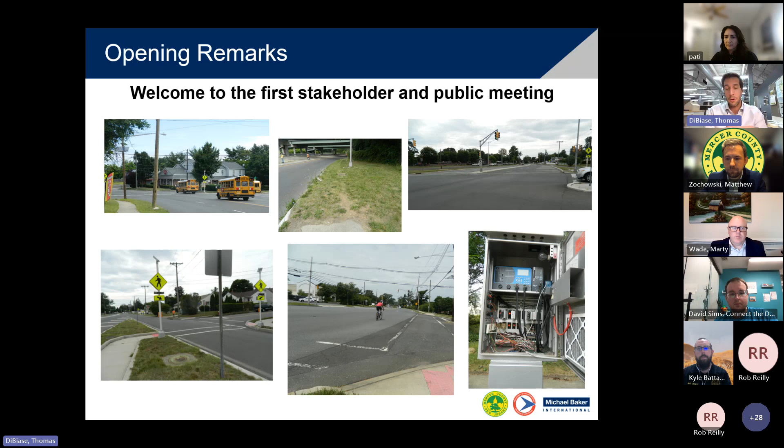We've had our opening remarks and covered our meeting guidelines. We're going to briefly start with a fun activity and review our public feedback process, then get into our project overview, where we'll discuss the project goals, the location, and some of the study materials we've collected thus far.

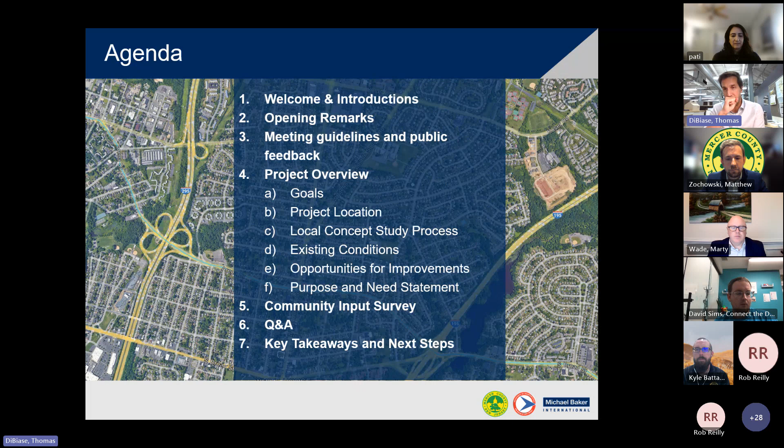Most importantly this evening, we want to review the purpose and need statement for the project, our goals and objectives, and hear your input on that document. We want to make sure we're framing this project appropriately and that the public has input. We'll also introduce our community input survey on our website, encourage you to visit it and fill it out as a great way to get involved, then open it up for Q&A and conclude with key takeaways and next steps.

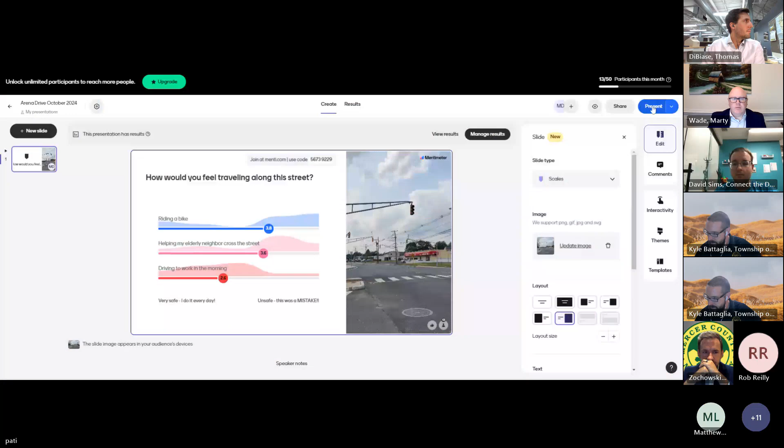All right, this was just a very brief activity to get you all in the mindset of why it is that we're all here, why this is an important activity. So it sounds like riding a bike feels like a pretty unsafe activity on this particular intersection. There are no bike lanes, it's very wide. It also feels like next on the list is crossing the street with an elderly person, not super safe either. And then driving to work feels like the safest activity. Thank you all for participating.

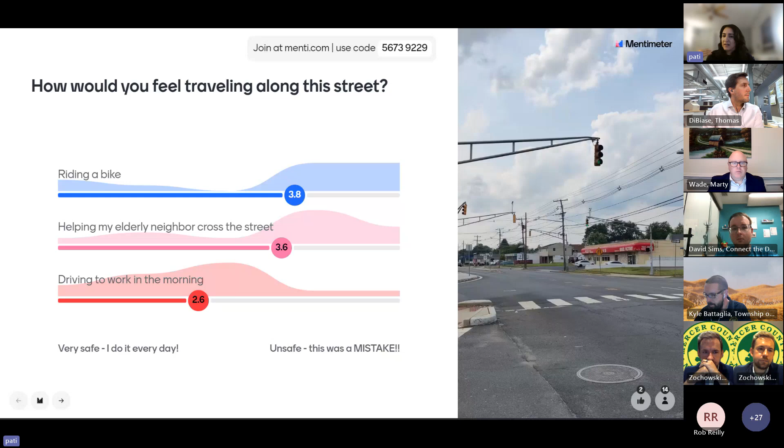It was just to give us a sense, as Tom is walking us through the presentation, think about what your experience is on Arena Drive. If there are any intersections we missed, please put any input in the Q&A, and we are recording all of that to share with the design team. Thank you so much.

So I'll take us through our meeting goals here. Of course, we're here to introduce the project to the stakeholders and to the public. Our mission is to review our existing conditions that we've collected for the corridor, and also to review our opportunities for improvements and to gather feedback from our stakeholders and the public on these key issues. So those are our meeting goals in summary.

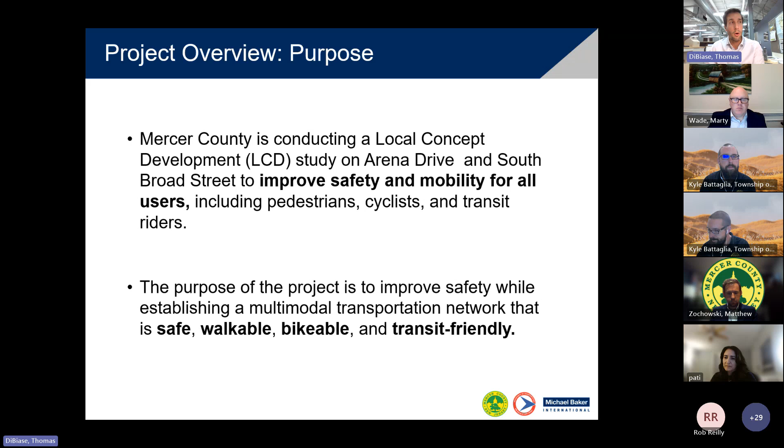So this is a project overview. The purpose of the project: Mercer County is conducting this local concept development study to improve safety and mobility for all users, including pedestrians, bicyclists, and transit riders. The purpose is to improve safety while establishing a multimodal transportation network that's safe, walkable, bikeable, and transit friendly.

Now, we have spent a little bit of time on our study area map already. Important takeaways here is that it's a community roadway, and Mr. Zochowski laid this out quite nicely in his opening remarks. It serves as a regional connector, but this is a community roadway first, and the proximity to McGalliard Elementary School and Yardville Heights Elementary School really sends home that message to us as the project team that we need to find opportunities to make crossing this roadway as a pedestrian, bicyclist, transit user, or even as a motorist, more safe in the future.

After that is concluded, we convene to develop alternatives. So the project team develops alternatives to address our purpose and need and goals and objectives, and the feedback that we've received from the public and our stakeholders.

And we develop alternatives, and we have another touch base where we come back and meet with stakeholders to discuss those developed alternatives. Then we select a recommended preliminary preferred alternative, and we meet one last time with the public in the spring to present that preliminary preferred alternative before completing our project through some reporting.

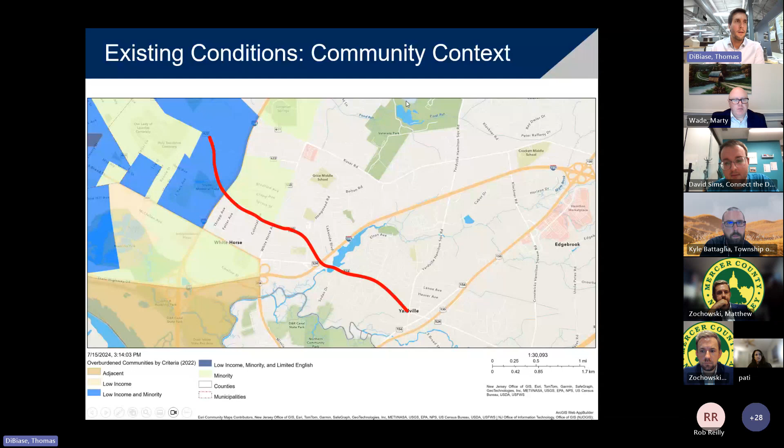Okay, I'll move on to our key issues. So essentially, our roadway design enables speeding. Because we have highway interchange ramps that come directly and meet Arena Drive and South Broad Street, these interchange ramps enable speeding. And wide cross sections at our intersections also reinforce this behavior. Below I-95, with very wide lanes, it reinforces this opportunity to speed.

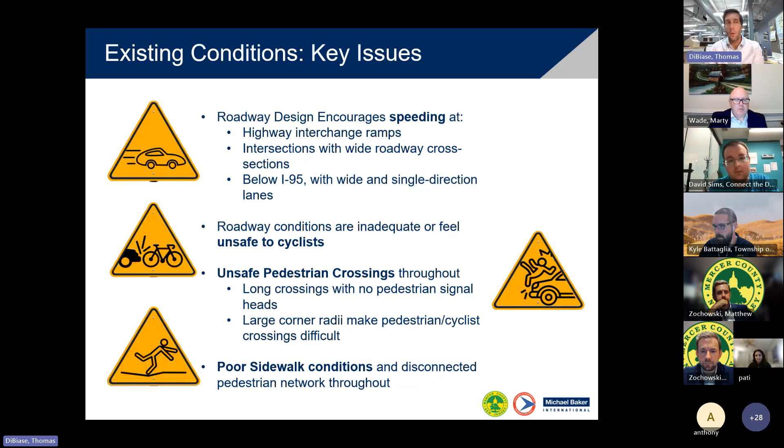Roadway conditions are inadequate or feel unsafe to bicyclists. And there are unsafe pedestrian crossings throughout the corridors, with long pedestrian crossings with some deficient crossing equipment like pedestrian signal heads and faded crosswalk striping. We also have large corner radii that make pedestrian and bicyclist crossings difficult. And in some areas we have poor or deteriorated sidewalk conditions, or disconnected pedestrian networks throughout the project. So we'll move on here.

So this is essentially a look at how roadway design enables speeding. Here's our highway interchange ramps. This cross section, and the favorable geometry for turning as you're coming off the interstate, suggests to motorists that they're able to travel at high speeds. Secondly, we move to our intersections with wide cross sections, so it's a long pedestrian crossing from one side to the other on many portions of this roadway. And here we have our section below I-95, where we have a single direction roadway that's awfully wide, which again encourages and enables speeding to take place.

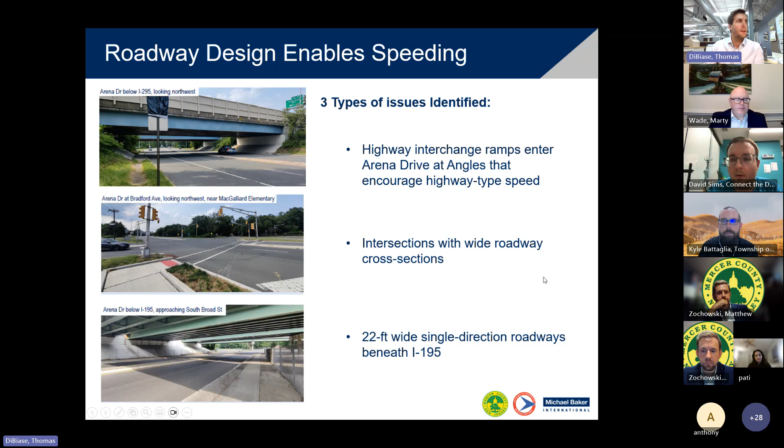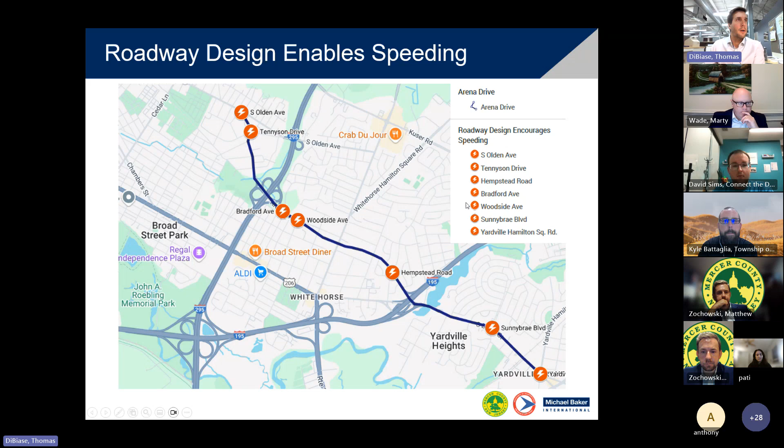So we have a number of intersections noted here, and the purpose of the slide is to communicate that there's opportunity, especially at these particular intersections which are awfully wide, for us to slow the speed of through traffic and turning vehicles. We have wide radiuses on many of these turns that allow for favorable turn geometries, and they decrease the opportunity for motorists to yield to pedestrians, bicyclists, and transit users, or to perform their maneuver safely. So I'll move on.

So I'll move on here.

At Yardville Hamilton Square Road, we have another section with rather large corner radii that make pedestrian and bicyclist crossings more difficult. We identified a handful of intersections, including Tennyson, Bradford, Hempstead, Sunnybrae, and Yardville Hamilton Square, where we have favorable geometry for turning maneuvers, which is unfavorable to safer driving conditions and effective, easier crossing for road users.

Here's an example of some of the poor sidewalk conditions we see on the corridor. We have a disconnected pedestrian network throughout the corridor. Here's an example near Central Avenue. We see that repeated not only at Central, but between Central and Reeves, near Colonial Avenue, and there's an unfavorable pedestrian situation under the I-195 interchange as well.

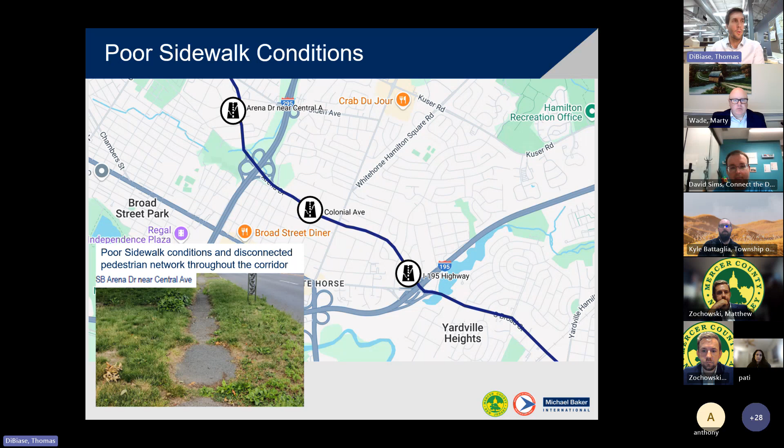All right, I'll move right along. This is a great look at our crash hotspots on a heat map. Basically, the deeper the red color, the higher the crash density along the corridor. This data is from 2017 to 2021, a 5-year period. What you see below is a little difficult, but I can walk us through a few of these intersections.

This graphic shows the number of crashes on the y-axis, and on the x-axis it shows the corridor. Here's Arena Drive, and this corresponds to the crash hotspots you see above: South Olden Avenue, Tennyson, Reeves, Bradford, Whitehorse Avenue, Gropp, and Hempstead. So a good number of our signalized and unsignalized intersections along that stretch.

For Broad Street, we have Highland Avenue and Coleridge, as well as Sunnybrae Boulevard and Yardville Hamilton Square Road. It's important for us to analyze crash data. We take a look at crash contributing factors, as well as crash type and other circumstances around all of our crashes, especially focusing on our fatal and severe injury crashes. We draw conclusions from those as we build alternatives for solutions for the corridor.

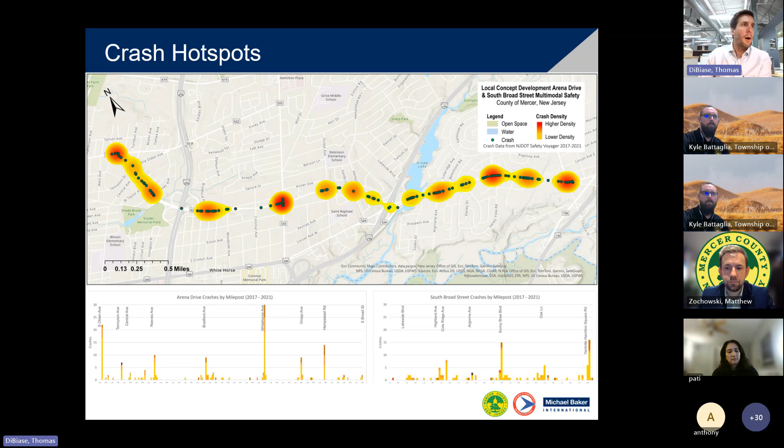An example of that appears here, showing how we use data to inform solutions. Here we have a look at fatal and serious injury crashes on the corridor. We can see that 2 of these crashes are pedestrian crashes, so 50%, and our lighting condition for 3 of our 4 crashes were in dark conditions.

So some examples we may draw from data like this would be that we have inadequate street lighting in certain locations associated with these crashes that would need to be addressed through the project, and that we have issues around pedestrian safety, where crossing countermeasures and improvements should be deployed at specific intersections to solve these issues. That gives you an example of how we approach the project and how we use data to inform our solutions.

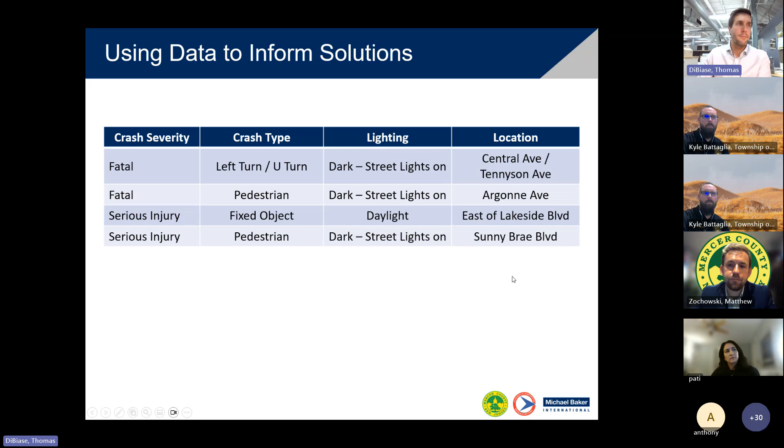Okay, I'll move on. So here's our opportunities. We have a number of traffic signals along the corridor, and plenty of opportunities at these locations to improve crossing conditions, to address our geometry on the roadway, and to improve conditions. I've basically covered this point already, so in the interest of time I'll move on. But this is an example of some of the signalized intersections, which are hotspots for crashes, and we expect to address these throughout the project.

Here's some opportunities for pedestrian and bicycle infrastructure. The map is showing a couple key areas where pedestrian and bicycle infrastructure is essentially not available for longitudinal travel along the roadway.

Underneath our underpasses at 295 and 195, conditions are unfavorable due to the wide cross section, or due to degradation in our sidewalk, or we have a path that's inadequate to fit both a pedestrian and a bicyclist at the same time.

We've also identified Gropp Lake, knowing that we have a fixed cross section across a bridge there, which is also a potential problem area. Our mission is to find better ways to build out pedestrian and bicycle network along Arena Drive and South Broad Street, addressing key points at these interchanges where crossings are unsafe, as well as Gropp Lake, where our cross section is constrained.

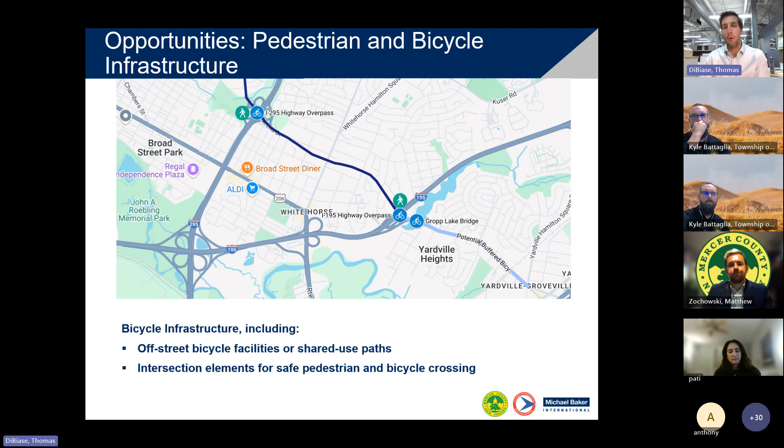I'll take us through our purpose and need statement. The local concept development phase involves drafting a well-defined purpose and need statement. That's our first mission, and the statement will be used to develop and evaluate potential alternatives. This is informed by community outreach, data collection, environmental resources, and socioeconomic conditions, which all come together to form our purpose and need statement. Eventually, our purpose and need statement defines our conceptual alternative selection.

Our purpose, and I'll repeat it again: the purpose of our study is to address safety deficiencies on Arena Drive and South Broad Street while establishing a multimodal transportation network that's safe, walkable, bikeable, and transit friendly.

On the next slide, I'll give an example. We can pause and review this later, but our mission is to visit the text in bold—these are our goals and objectives. So we're here to address our roadway deficiencies to improve multimodal safety. That's our first goal up top.

We do this by implementing FHWA—Federal Highway Administration—proven safety countermeasures. They have a suite of proven safety countermeasures available for us, and of course we have extras we're going to explore for the roadway in order to get proven, tried and true safety improvements.

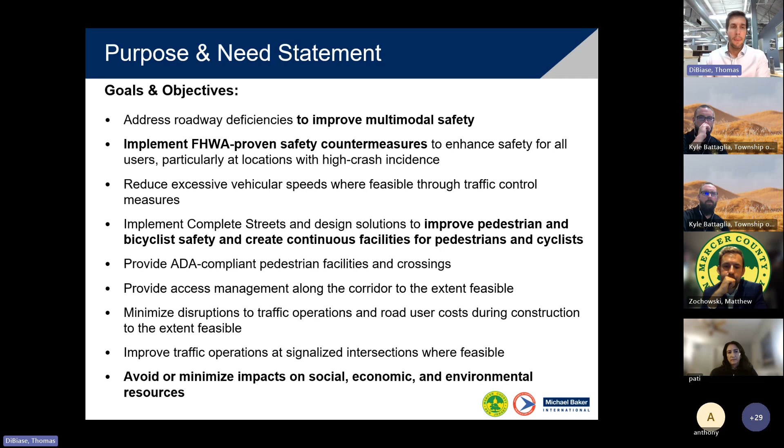I'll conclude with our last goal at the bottom of the page: to avoid or minimize impacts to social, economic, or environmental resources. Here, social economic refers to the neighborhood, our neighbors, our residents, our business owners, our community. Our mission is to minimize impacts while addressing our purpose and need, and the environment is included in that statement as well.

Our community input survey is one of the best ways to get involved with our project. Completing our survey is a tremendous way to focus our efforts and to hear your feedback. It's published today to the website, available at mercercounty.org/Arena Broad Safety. You navigate to that site, scroll to the bottom—I'll take us to that page in just a moment—and you'll see a link to fill out the survey.

We're requesting input on your experience traveling on the corridor, your relationship to the project corridor, whether you're a resident or work nearby, your top issues, whether speeding, congestion, lack of safety, or what have you. We want your feedback on project goals and your suggestions. Results will be summarized and included in our project report, and we will review them at future meetings, including our next public meeting.

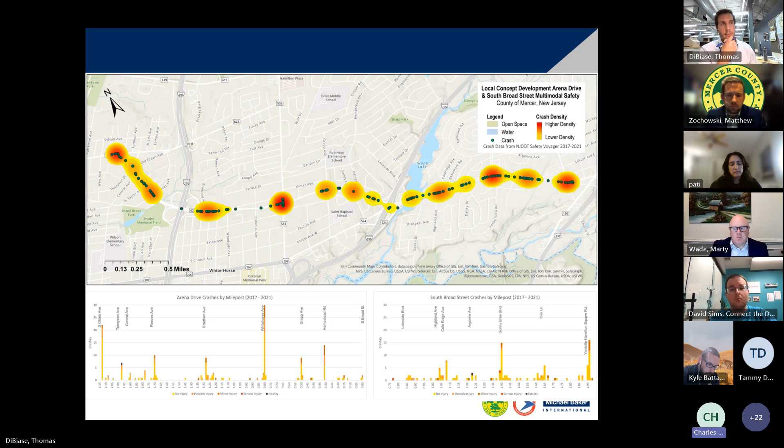Yeah, but that actually did work better in terms of accidents. Instead of 3 a month, maybe I only have 1. But again, the big concern is the speeding coming off of 195 down the ramp. Nobody goes 40 miles an hour, I noticed, but so it is better, but I still see people taking their lives in their hands crossing, and I hear horns beeping and blaring all the time from my window here. And it is better, but I'm wondering, any part of this concept and development plan is to add a light to this intersection? So I know you talked about making where all the lights are right now better, I think you mentioned earlier, but is there anything about actually adding a light to this intersection, Hempstead?

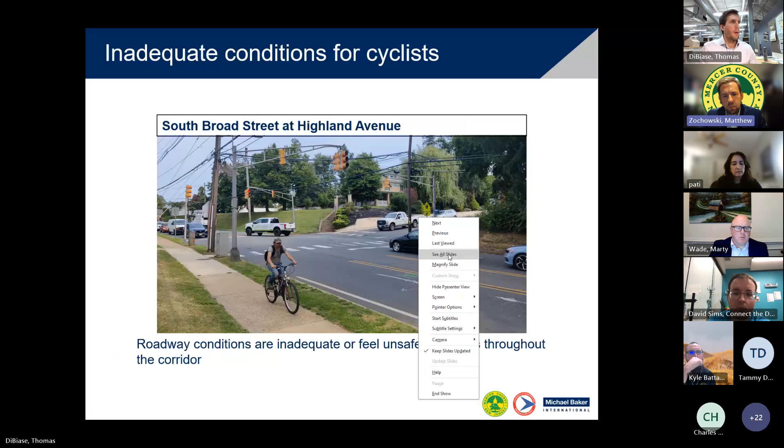Hempstead is one of the locations we're looking at for some kind of control. I wasn't sure if we're looking at a light or other improvements, but it is an intersection we've been working on at the county. I mean, we did make those slight improvements a few years ago. We have put in a partial road diet. It hasn't extended past a certain point, but the road diet is something we are considering for a larger stretch of Arena Drive.

Especially when we get into alternatives analysis come like November, December. Yeah, and Hempstead is so wide, just even pedestrians trying to cross Hempstead from the one corner. I mean, it's crazy because cars that are coming up to go towards 195 to cut up Hempstead, they fly around that corner. And I tell people, you got to look behind you to make sure there's no cars coming. It just really needs some kind of work there.

I'm sure Hempstead, that is a major focus due to the size of that intersection. Yeah, we're looking at ways to address it from a geometric perspective to really induce safety. So, Hempstead is a major focus. Absolutely. Thank you. All right, thanks. Charles, thank you so much.

Yeah, thank you. I think part of the concern too is Hempstead was seen as a cut through to get to South Broad Street, kind of bypass the spaghetti with 195, essentially.

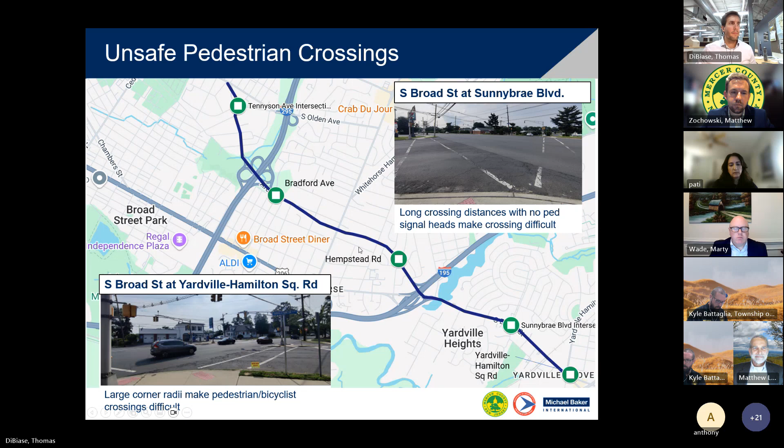I guess the other thing is, you're trying to make a lot of these areas safe for bicycles and pedestrians, and I can't imagine how they could become safe. The volume of traffic on these roads and how fast people go, I don't know how people can even do that and feel comfortable or safe to walk or ride a bike. It's pretty bad, but I appreciate that we get to be part of this.

I've never participated in anything like this before, and I'm glad I got to do this. It actually came up on the Hamilton Township website—I get their emails every other day, and it was on there to register to be part of this. So I appreciate that you were able to do it. And if someone could address the South Broad Street thing, if you're doing anything about that highway, I'd appreciate it. Thank you.

Sure, I'd like to speak to that. This is Matt Lawson again, Mercer County Planning Assistant Director. One of the issues we face is jurisdictional differences. I talked about the interchange at McGalliard and Bradford with 295, but US 206, coming through Whitehorse Circle onto South Broad Street, is state NJDOT jurisdiction—their roadway up until the border with Trenton. The Arena and South Broad segments we're considering are, except for those NJDOT interchanges, under county ownership. But South Broad from Whitehorse Circle into the city is under NJDOT ownership, a US highway. Unfortunately, when it hits the city, it becomes a street owned and operated by the city of Trenton, which goes back to the turn of the previous century. So those jurisdictional differences create problems for us, because we have to work cooperatively with those other agencies to get things done.

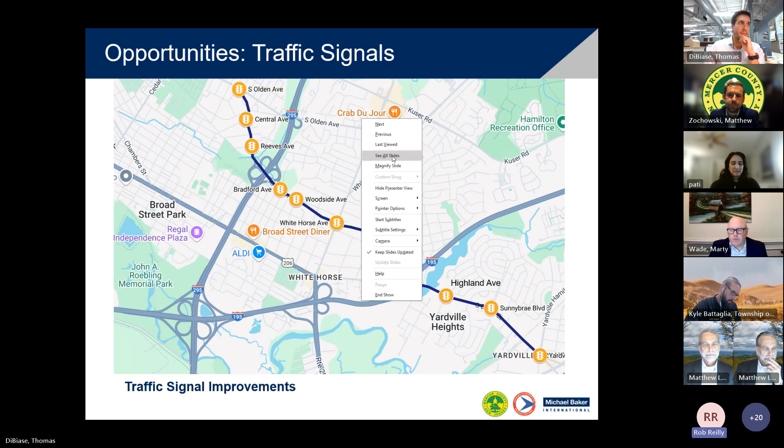Thanks everyone. I see Rob Reilly has a question as well. I just wanted to know, so after you guys take our feedback, what's next steps? When's the next meeting? And then what is the agenda on a very broad overview? What is the goal for the next meeting?

Sure, I can help answer that question. So we're here at the fall 2024, we're at this middle box. We're performing our stakeholder and public meeting. So what we'll do is after this meeting, we incorporate your feedback. We make sure that our purpose and need statement and our goals and objectives are settled. We finalize those with the project team through addressing your comments.

There's a few other things that do happen. Of course, I should be remiss - this recording gets posted to the website. We have a comment period that lasts for 30 days. So encourage your neighbors and others to reach us via our email and to provide your comments. We incorporate those comments. We make sure our purpose and need statement is correct and accurate. And then from that point, we've concluded our collection of existing conditions.

We've heard from local officials, stakeholders, and the public, and the project team in coordination with those local officials and stakeholders, we begin to develop alternatives to address these issues on the roadway. And the next time we will reach back out, we will meet with local officials and stakeholders in the winter period of 2025. And you folks as stakeholders, as direct residents, will have an opportunity to attend that meeting. And that 600 homes that were mailed to will be mailed to again during that stakeholder period.

And then after that period, we meet and we review our alternatives development. So we look at our homework and we see what concepts we've developed to address the issues that we see on the corridor. And following that, we incorporate feedback from those meetings from local officials and stakeholders once again into the process. So it's another loop, and we refine our concepts. And then we select our preliminary preferred alternatives, our preliminary choices for what we feel are the preferred choices for the corridor.

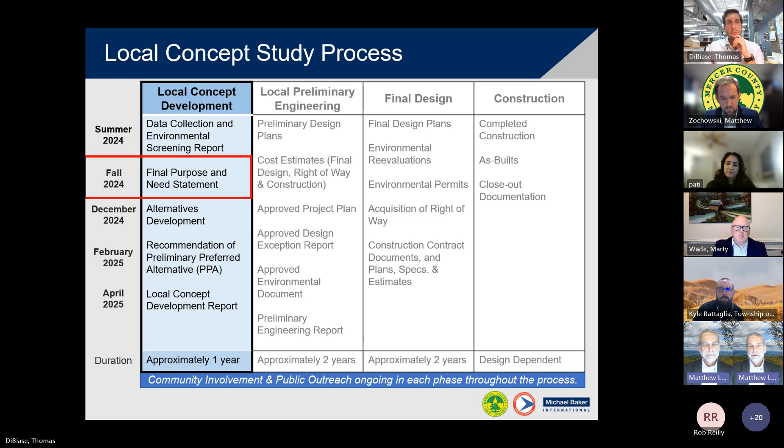That's one of our primary goals here, is not just for motor vehicles, but for school kids, for people on bikes. And thinking about Arena and South Broad, these segments of roadway that are under county jurisdiction, how do we make this safe for all users? How do we make it a corridor that allows people to get around town without using a car? And if we can achieve that goal, then I think we'll have achieved the purpose and need for this project.

But public input is very important, and I appreciate everyone coming out for this meeting and letting us know your concerns. Thanks.

I wanted to add our two cents on the community engagement side. I just wanted to reiterate that all of these comments have been, we've been taking notes of absolutely all the comments. You've actually pointed out some areas that the design team either had not fully considered, or it was really good to hear confirmation about some of the other ones as well.

And all of these comments will be incorporated for the next phase. And we really would invite you to come to the next meeting, where we'll be able to show and walk you all through each of the options. It'll be an in-person and much more interactive experience, where you'll be able to see and ask questions about them. So we encourage you to tell your neighbors and reach out and stay informed through the website as well.

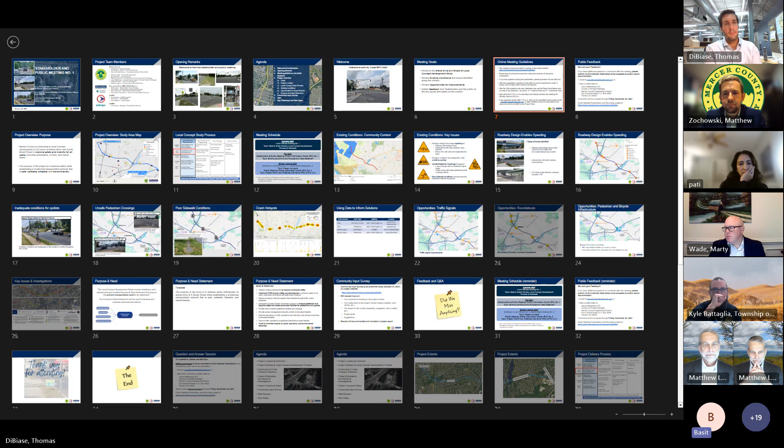Something that is somewhat interesting as an engineer to me is that for the first time in a long time, I would say probably in my career, which has spanned over 35 years, we are allowed to change how we evaluate these roads and what conditions we can impose, thanks to the 11th edition of the MUTCD manual. In the past we were tied down to the 85th percentile. For the first time we have been relieved of that burden, and we have been given the freedom to decide on the basis of usage, especially the pedestrian and the bicyclist. Anybody who knows me knows that I am a huge proponent of those two modes, and I will do whatever I can within my limited power to make it happen.

Having said that, the speeding is - ladies and gentlemen, take it the way I'm looking at it - I live in Ewing, I don't live in Hamilton. At 7 in the morning, those are your neighbors who are driving fast. I'm hoping the message goes to them: please slow down. We live here, you all live there. We will do what we have to do, what we can do to bring the speeds down. I am very much committed to doing that.

I would love to see more bicyclists and more pedestrians, more micromobility. That is one of my stated goals, and God willing it will happen. Maybe not to the extent you are hoping for, maybe better than that. Let's see where the results go. But I greatly appreciate all the input we have received.